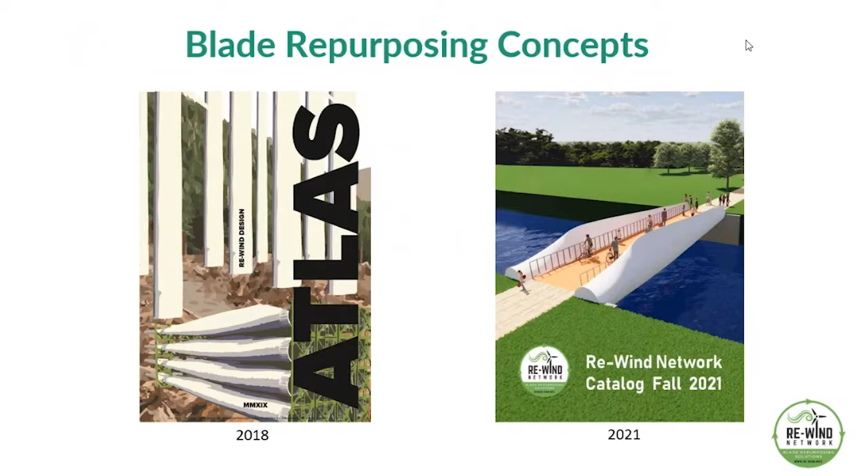As part of our activity, we've done a number of ideation workshops to develop blade repurposing concepts, and then to bring those concepts into engineering reality through extensive virtual analysis, not just renderings. The first one was in 2018. We produced a design atlas, which can be downloaded from our website, and we've just recently completed our 2021 catalog. These are some of the concepts you would see in our catalog - renderings, generally, but using real geometries of actual blades rendered into various situations: housing, bridges, poles, barriers, for example. Many other concepts that many around the world have thought of as well.

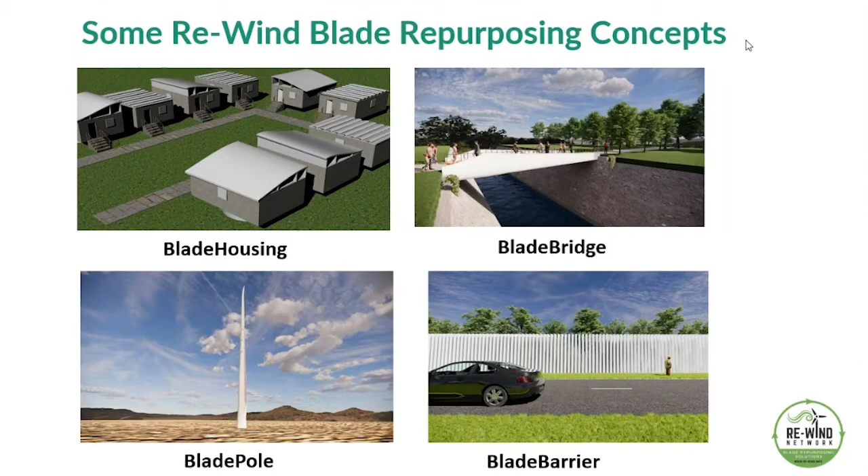Just to give those of you who are not familiar with wind blade technology - the wind blade, of course, is the wing of the propeller, those 3-bladed turbines which are the common ones these days. Those are the energy capturing devices that turn the generator and the turbine. So this, for example, is the first wind farm that I visited maybe 6-7 years ago.

This is in upstate New York. This is a Vestas V82 blade, which is about 40 meters long - a very, very small blade at the moment. You might have heard in the news that now turbines up to 15 megawatts are being built, mostly for offshore, and these are going to be over 100 meters long - 2.5 times the length of this blade. That's me standing at the tip. This blade perhaps has a chord - the maximum chord is at that center where you see the power transmission pole in the middle, the widest part of the blade when sitting upright, edgewise we call this.

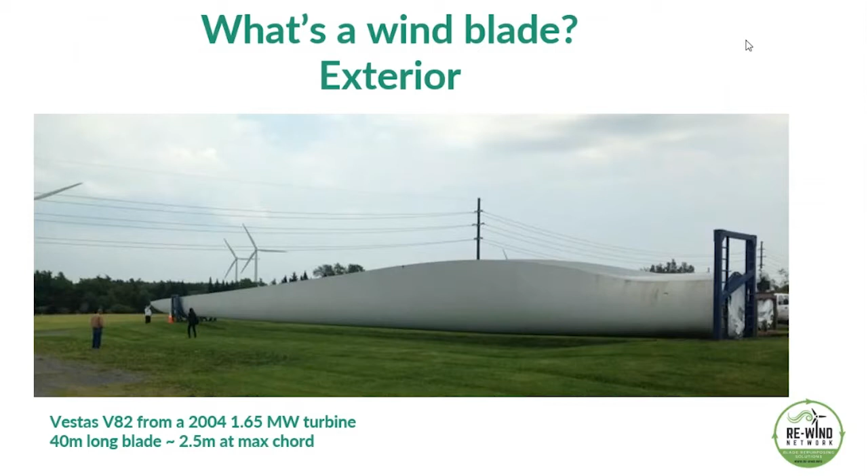What's inside a blade? The inside of a blade is quite interesting. A blade is hollow - it's a hollow tube, not unlike an aircraft wing. All of these blades are made of fiber reinforced composites.

99% are glass fiber reinforced composites. The early blades were glass fiber reinforced polyesters, and nowadays they're mostly glass fiber reinforced epoxy systems. Some carbon fiber is used in some parts of the blade, but very little at the moment.

We have two basic designs that are used. There's what is called the spar box, which is the box shown with the two webs and the thicker region above. This thicker region is what we call the spar cap, and that is primarily unidirectional glass fiber reinforced composite material, maybe upwards of 50 millimeters thick.

The other common design is a single I-beam design, which has a similarly very thick spar cap, and a web which is foam reinforced. Here you can also see the foam reinforced in the box spar, a slightly different design.

Both of these have leading and trailing edge. This is called the leading edge shells, and these shells are sandwich composites. In this case, balsa wood, but also foam may be used. You can see the differences in design - this is a larger blade, and this is a smaller blade.

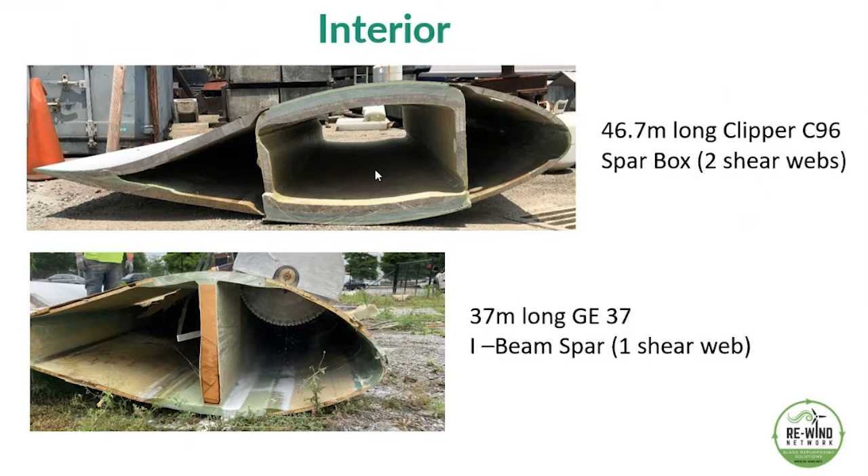From inside, it doesn't look very pretty. From outside, it looks very pretty, and the outside surface is finished to an extreme, to maybe a 5 millimeter geometric accuracy with various sanding and painting operations. Just to give you an idea of what this looks like along the length - sorry if some of the images on the right look a bit light.

The blade tapers and twists. It tapers lengthwise along the length and widthwise, as you can see in the upper left and the lower left. This is along the length, and this is looking down the width.

The profile changes from a circle at the root, where the blade is attached to the hub, through a transition region where the blade changes from the circular cross-section into an airfoil cross-section, and from probably maybe a fifth of the distance down, it then becomes an airfoil blade cross-section.

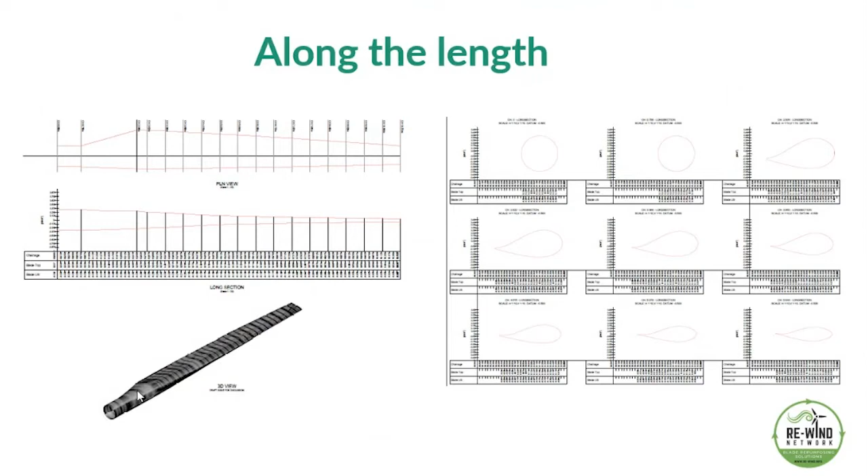This is an image taken from a 14.3 meter blade that Kieran will talk about in great detail later in the presentation. Codes and standards.

Essentially fiber composite materials started becoming of interest to the civil engineering community in the late 70s, early 80s. By the mid 90s, there were a number of activities, mostly starting out in Japan. This work was as a response to the Kobe earthquake, and much of the retrofitting that was undertaken with respect to their bridge and highway infrastructure.

The first document of note to describe structural design with polymer composites was produced in the UK by a consortium called Eurocomp. It was a compilation of documents related to how one would design with fiber composites in a civil engineering, structural engineering environment, as opposed to in what was typically an aerospace or mechanical engineering environment.

I wrote a book in 2006, which is probably the first textbook related to structural design with FRP materials, and it covers reinforcing bars, strengthening materials, and also standalone FRP, fiber reinforced polymer parts.

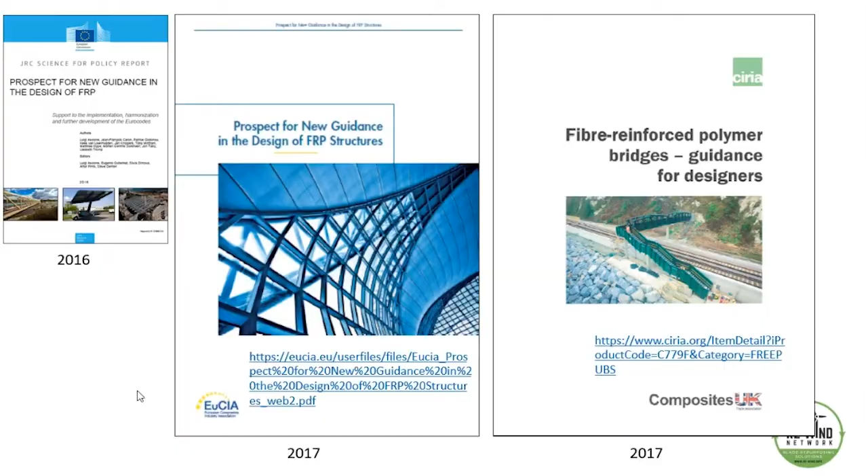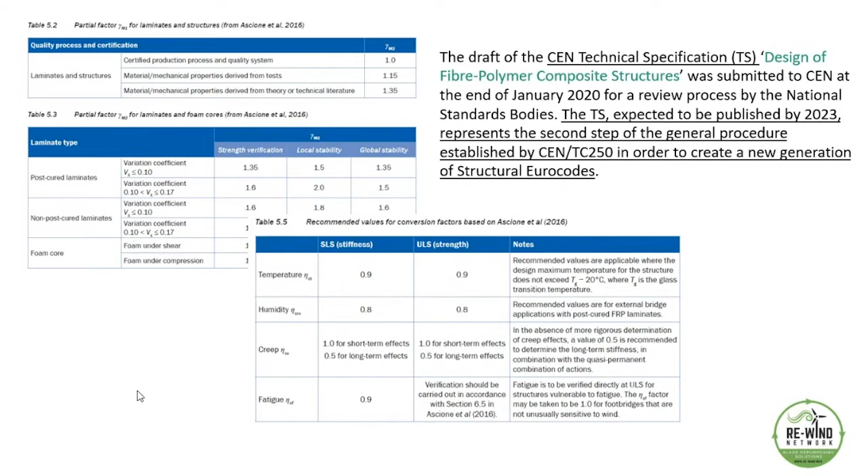Both of these documents include the appropriate partial safety factors, or material partial factors, that would be used in a typical load and resistance factor design procedure according to the Eurocodes.

The future of this draft specification is as follows. The technical specification has been written by a committee, including, from the UK, Professor Toby Mottram from Warwick University. This is to be called Design of Fiber Polymer Composite Structures - not fiber reinforced, but fiber polymer - recognizing that both the fiber and the polymer system, in fact, reinforce each other.

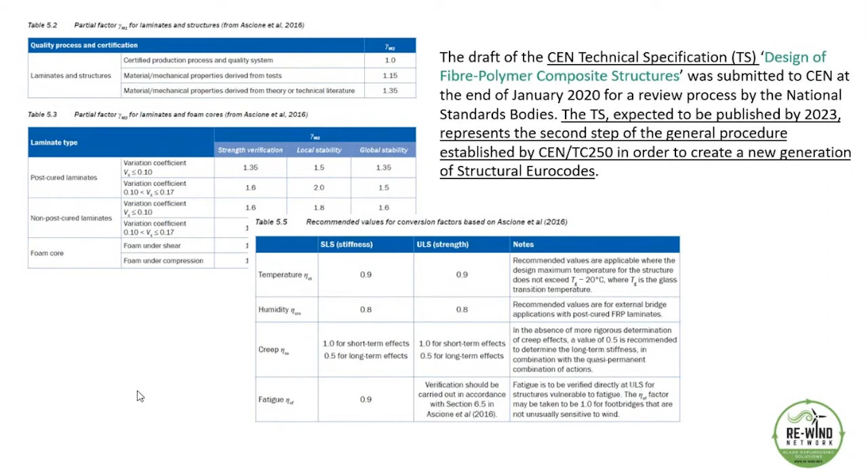This was submitted in 2020. This technical spec is expected to be published in 2023. Then it will go for the second step of production into a Eurocode, which we think should be published somewhere in 2024 or 2025.

So we're well on the way, and there are clear procedures to follow. Just to give you an idea of the partial safety factors: the material partial factors relate to two things. Number one is the uncertainty in the material properties, which can range from 1 to 1.15 to 1.35, depending on how the material properties are obtained, either from testing or theoretical predictions. The second part of the partial factor is the uncertainty related to the production method of the composite, which can go from 1.35 all the way out to 2.0.

These characteristic values used together with the material partial factors are defined as the 5% fractile of the material property value, following a standard Eurocode characteristic value determination. To give you a sense of applying those factors: the worst case would be a factor of 2.7. Inverting that gives you 0.37 - in other words, you're utilizing about 37% of the capacity of the material. A best case scenario, you would utilize 74% of the material capacity in your material partial factor. But that is not all the reduction that takes place.

There are what are called conversion factors. That material factor and characteristic value is again knocked down or reduced for temperature effects, humidity effects, creep effects, and fatigue effects. This gets fairly complicated and depends on the actual application you're interested in. So that factor can get knocked down another perhaps 40 to 50%. So your worst case would be operating at about 15 to 20% of the ultimate capacity of the material. In your best case, you might be operating at 30 to 40% of the material capacity. So there are, in the existing code, significant factors to enhance the safety of design with fiber composite materials at this time. One expects that as time goes on, these factors will be reduced.

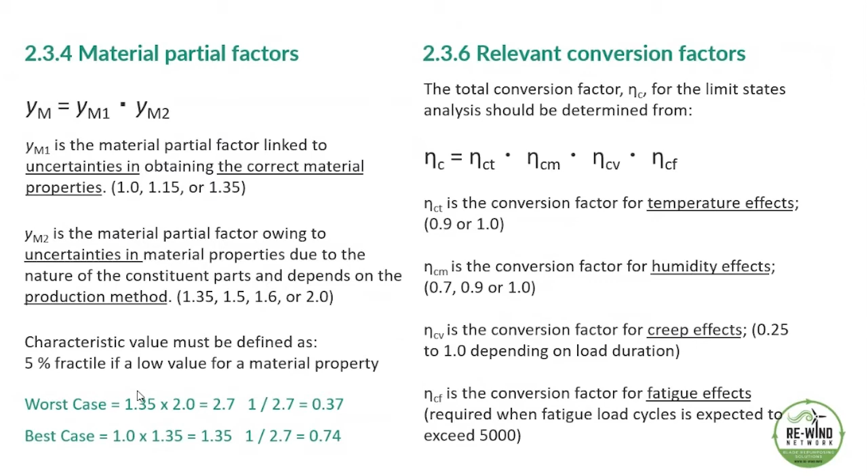And this is not considering the load factors, of course, that are applied to the other side of the load and resistance equation. So what's the problem? What is the wind blade material quantity in the UK?

Looking at installed capacity up to 2021, this is the current information as of the second quarter of 2021. These are the statistics - currently the UK, up to 2021, has a cumulative capacity of somewhere around 20 gigawatts.

This translates into blade material. Here we've got the cumulative capacity in thousands of tons of material from 2020 to 2041 installed, and this would be the material coming out of service, offshore and onshore. We have material coming out of service, but not much now.

Because we're assuming, and this is a common assumption, that the turbine is designed for a 20-year life, and we can use a conversion of 10 tons per megawatt. This is also subject to some debate because many turbines have lifetime extension now, and many are coming out of service before their 20-year life due to repowering activity. But assuming 20-year life and 10 tons per megawatt...

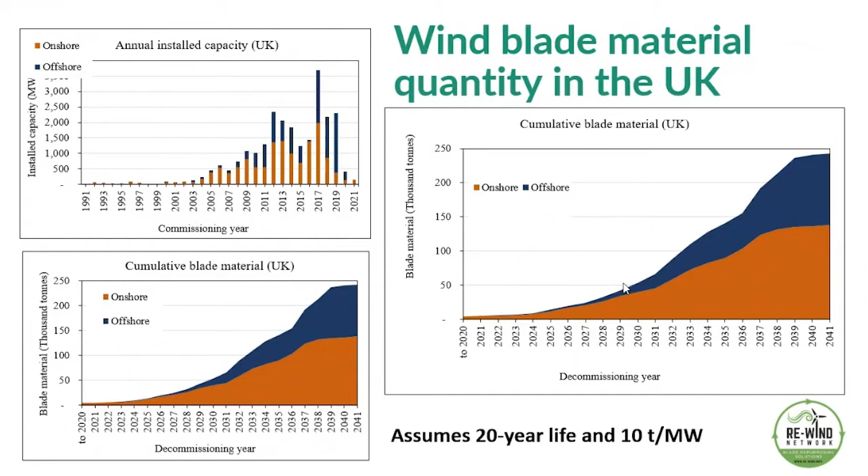If you cannot send these to a landfill and you cannot incinerate them, you have to recycle or repurpose them in some way. There have been a number of recycling ideas proposed over the years. Most of them include downsizing the product, either grinding it down and using it as a filler, or going even further to chemical decomposition called pyrolysis, a heat treatment to burn away the resin and recover the fiber for secondary use. Those are mostly still in either the non-commercial or experimental area.

So what we are talking about is repurposing the blade - taking the blade and using it for some other purpose in civil engineering applications.

Having shown you the pictures of the blade, both from the inside and the outside, as a structural engineer—I'm a structural engineer, Kieran is a structural engineer—you recognize immediately what you need for engineering analysis. And it's non-trivial. You need the external geometry, so you need the airfoil shapes along the length. The blades bend and twist along the length.

You need an internal geometry. You need to know the location and the thickness of the caps, the webs, the shell sandwich panel along the length. You need to know the material types, typically glass, polyester, and epoxy. And you also need to know the laminates which make up this material.

You need a mass and volume fraction, so you need to know the material and where it is. Then you need to know the strength and stiffness of that material.

And then for structural engineering analysis—which is typically how structural engineers work—you need to know global blade structural properties: the flexural stiffness in both directions, the principal axes, and the shear rigidity or stiffness, including the shear stiffness with respect to transverse loadings, because in these fiber reinforced composite materials, shear deformation can be significant.

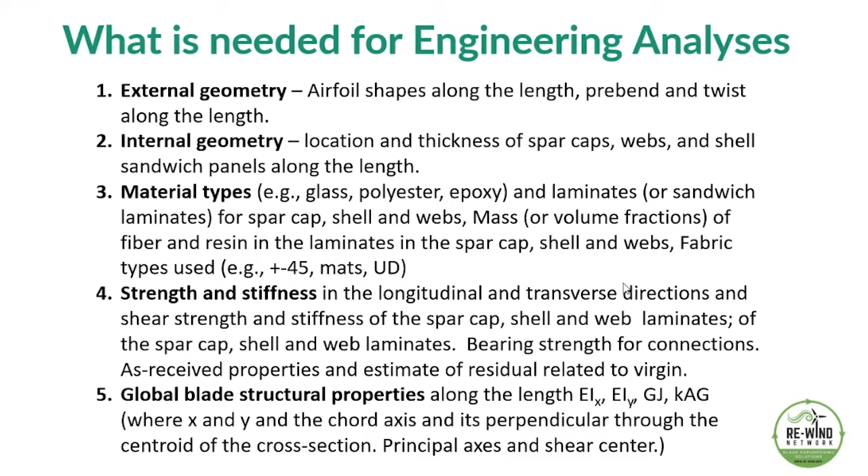However, when we do what we call one-dimensional structural engineering analysis, we need these one-dimensional properties for civil engineering, and that, once again, is not trivial to obtain. We have worked for the last four years in our Rewind group because we recognized very early on, after lots of brainstorming sessions, that until you know the actual geometry and actual properties, you cannot really design anything from an engineering perspective.

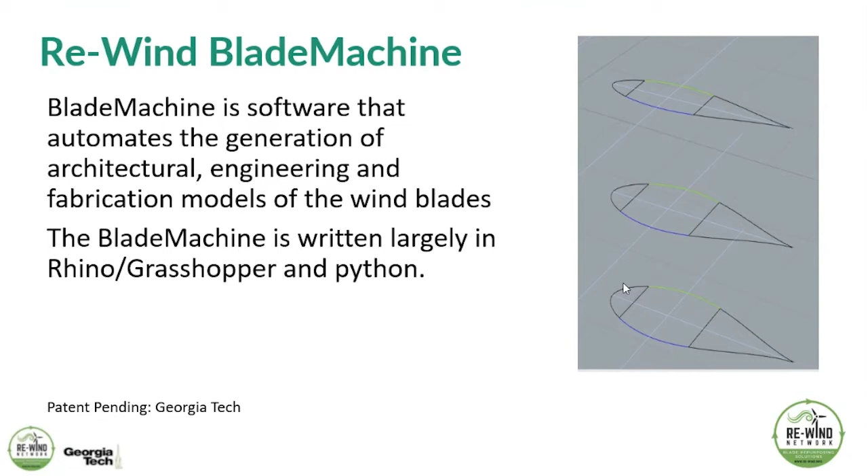So drawing a sketch of a repurposing project is nice, but it doesn't get you any further than a rendering or sketch. So we've developed a procedure to extract all of this information, going from LiDAR scanning of the blade, both inside and outside, some minor destructive coring of parts of the blade to determine thicknesses and materials, and then a code to develop the structural properties that can be used in any conventional structural engineering analysis program, such as SAP, RISA, any of the frame programs you might want to use.

So now we come on to examples of engineering analysis. I will very briefly describe first the work we did, using a blade section for a roof of a 40-meter-squared affordable house. That was a finite element analysis done at that time, because this roof is a shell type structure.

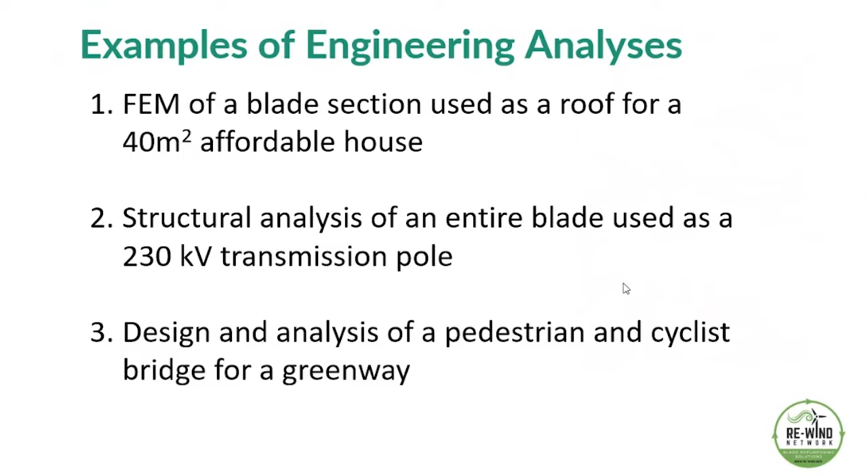We will then look at a structural analysis of an entire blade used as a 230 kilovolt transmission pole, which is actually a project we're working on currently in the United States, to be installed sometime in the next year. And then the design and analysis of a pedestrian and cyclist bridge for a greenway, the bridge being built in Cork, which Kieran will take over and describe.

But there were models of 100-meter blades that had been produced by Sandia National Labs in the United States, and also a very effective code to produce geometries and layups called NUMAD. This is downloadable from the National Renewable Energy Lab, NREL, in the United States, very easy to find. And from that, we extracted real geometries of the actual blade.

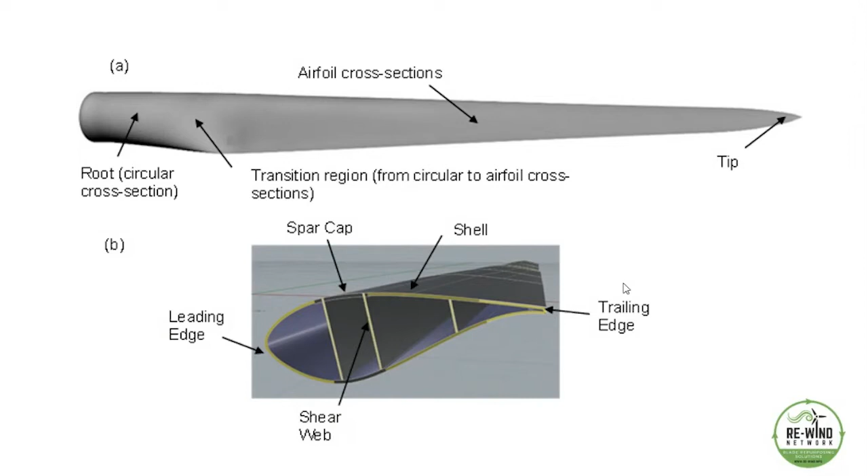This blade was designed to have a carbon fiber spar cap, which was needed for the stiffness of this particular structure. Some of the new carbon fiber 100-meter blades are also using carbon fiber in parts of the spar cap and other parts, and a foam trailing edge.

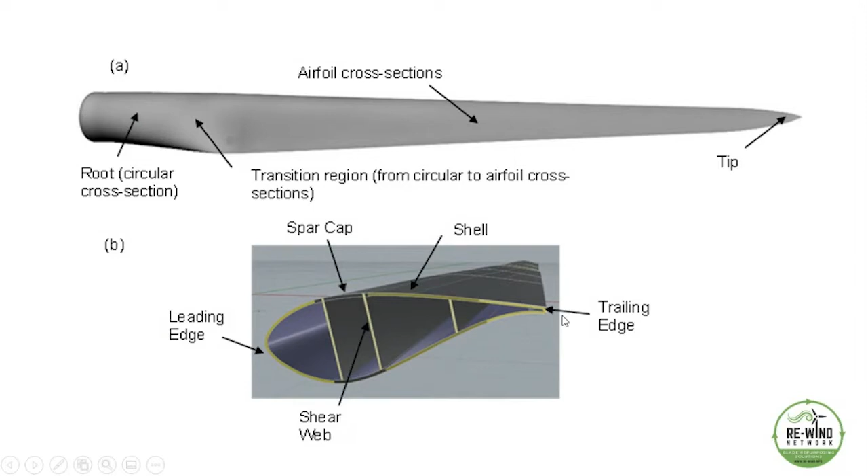This had 3 webs as opposed to 2 webs. This third web is quite common to see to support this large trailing edge panel, and typically only extends about a third of the way down the length of the blade.

Just to give you an idea of the analysis we did, this is the roof part. This blade is so big that if you cut it in the transition region, that transition region is about 7 meters wide. These are enormous, these blades. They really are enormous. This is 7 meters wide.

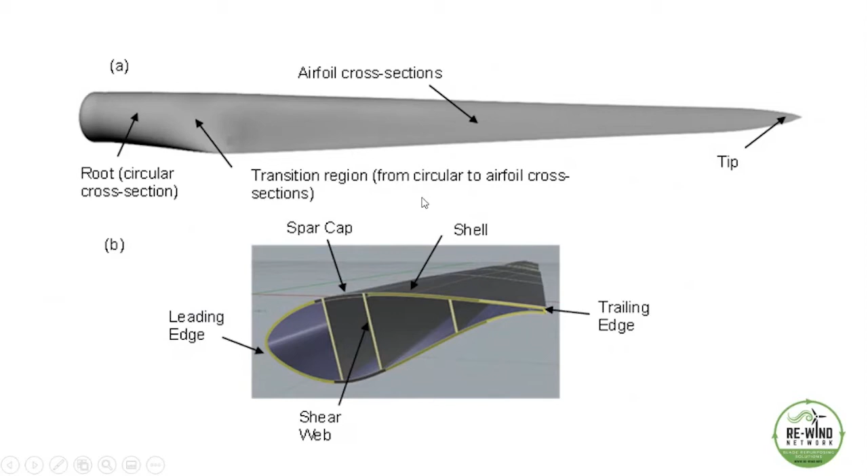You can make a house out of it, as you've seen. But here we just use half of that transition region to build a roofing system, which is about 4.5 meters wide and 8 meters long.

We used the LS Dyna finite element code to look at basically stresses and displacements and behavior in the different panels and in the different layers of the fiber composite material.

So, of course, with the finite element code, one can dive down into all of those details. As one knows, with the finite element code, you've got to know what you're looking for and know where to look for it many times to find the appropriate and relevant information that can be used for structural engineering.

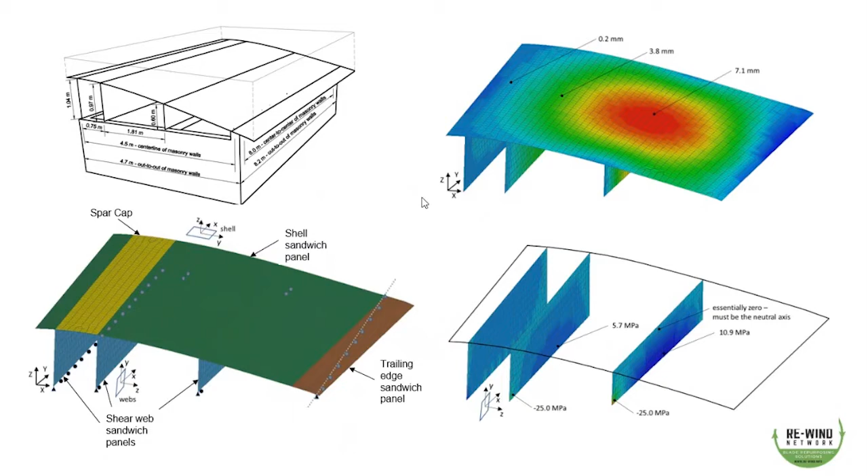A paper that is listed in the references that follows describes how the hand calculation of the same parts of this roof section was done and compares it to the results of the finite element analysis, the hand calculation being one-dimensional structural analysis, as structural engineers often do.

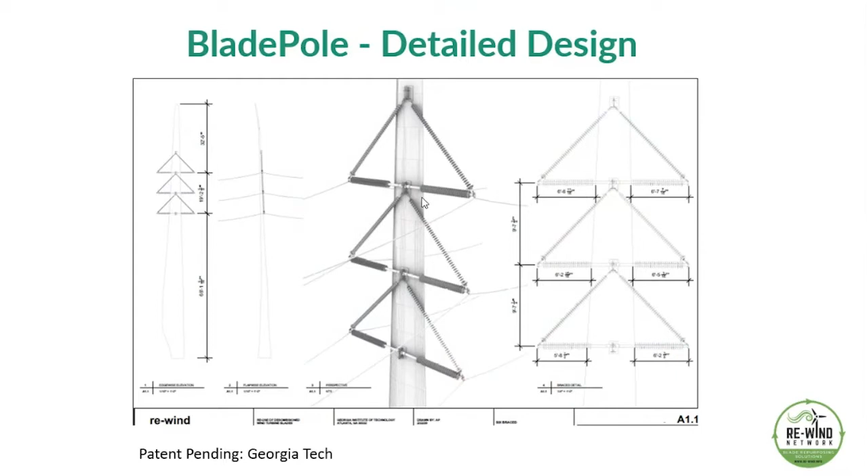The second example, quickly, is what we're building in Kansas in the United States. This is a blade pole, used as an electricity transmission pole, not distribution. This transmission pole is going to be about 120 feet high. The blade is a GE 37-meter blade, and we are at the point now of actual detailing and construction of this blade using full-size parts from transmission hardware.

We've done various cases of these, and these papers are also in the references listed, using our blade machine, extracted the section properties, and done conventional structural engineering analysis for the appropriate load cases for electricity transmission lines.

These are not the standard load cases that are used for buildings, and there is a code both in the US and in Europe for designing transmission structures. That gives the load cases and the factors required for those loads.

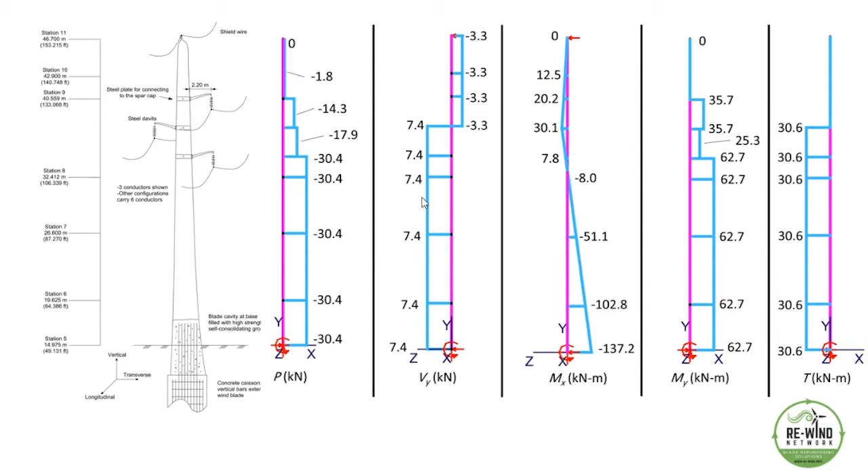So in fact, the most critical parts of this are up near the top of the blade where the fixtures are attached, because the section is thinner there and the material is thinner there. This is obvious if you think about it as a structural engineer, but needs to be kept in mind that any stress analysis of a non-uniform section has to take account of the structural properties as they vary along the length.

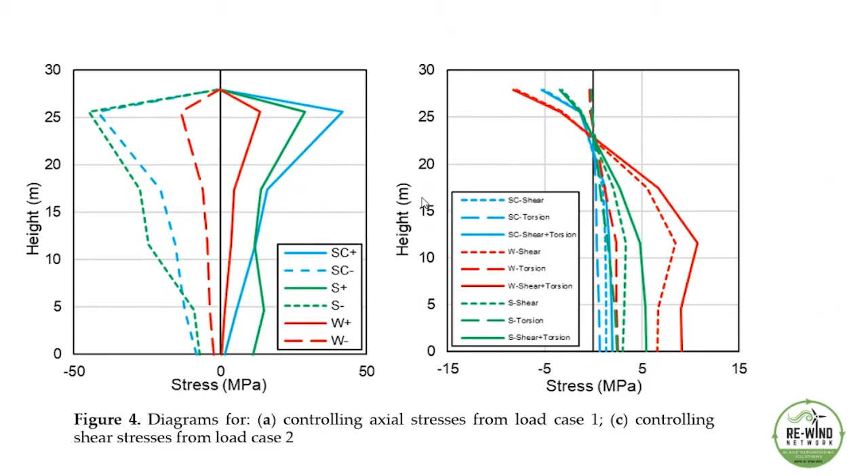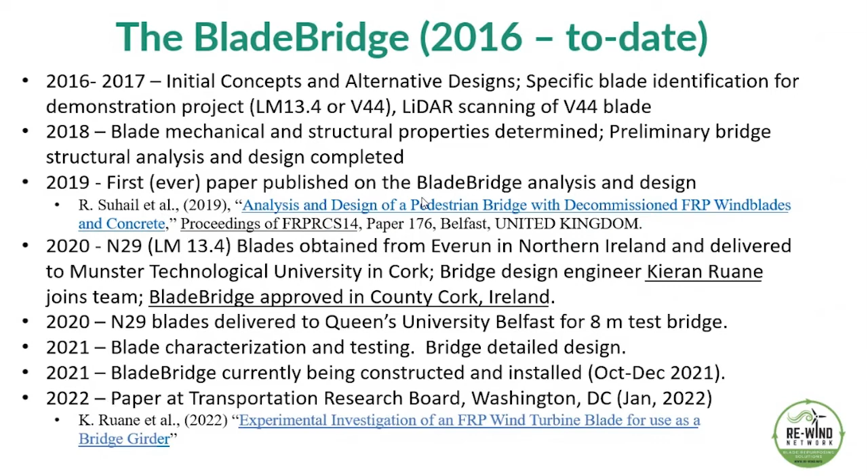The blade bridge, very quickly, is something we started about in 2016, 2017. We published a paper in 2019. We will be publishing and presenting a paper at the Transportation Research Board in Washington, D.C. in January '22 related to the work that Kieran is about to describe very shortly.

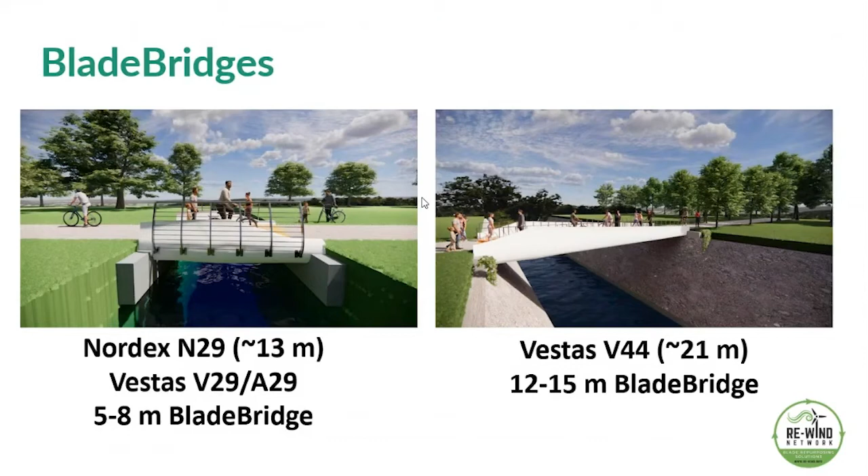Blade bridges can be of different sizes and spans depending on the blade you use, and they can have various different geometries. We decided initially to start with very simple, mass market bridges. One can envision all sorts of fancy suspension bridges, arch bridges, all sorts of funny or interesting systems.

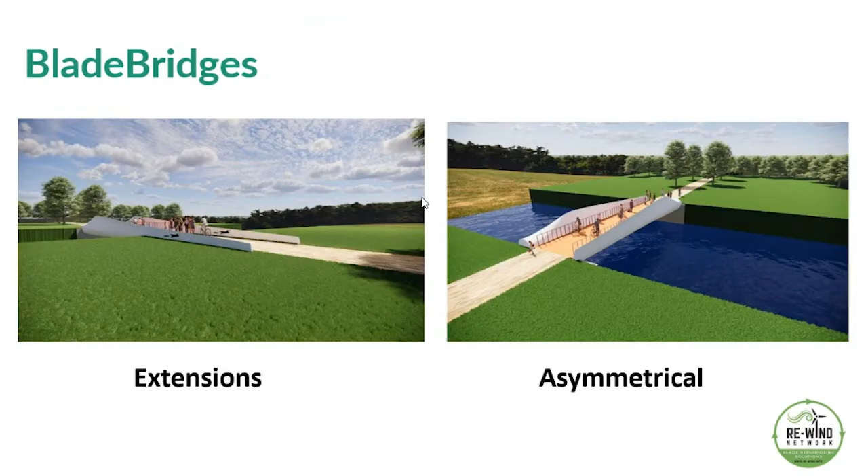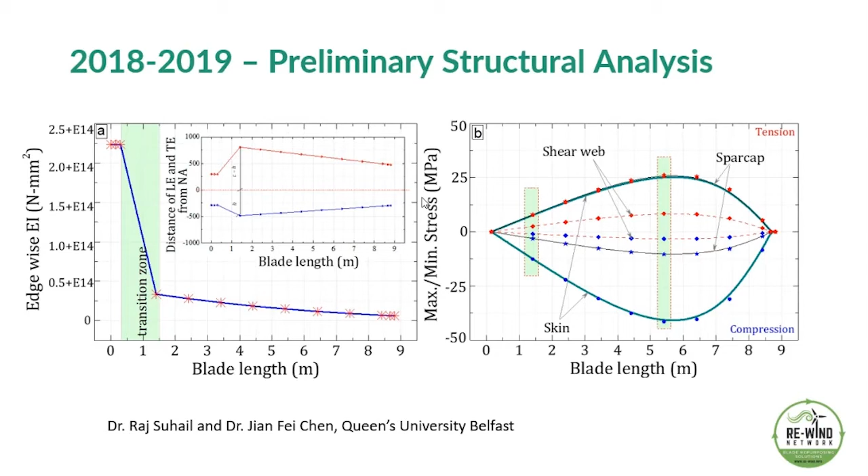But if these are going to use up a large quantity of blades of any type, there will have to be a relatively simple mass market application of these. This was the preliminary concept we started with, and this is some of the preliminary analysis done for the stresses and displacements along the length of the blade. This was done for a moving load, so you also have to take into account a moving load on a variable cross-section. This is an example of a cross-section with a deck system.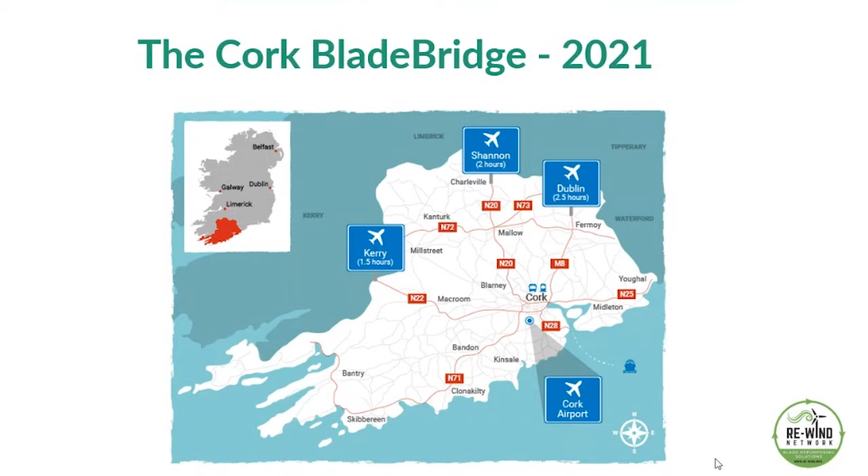The project I'm going to talk about more specifically is the conversion of an old railway line between the village of Midleton and the coastal town of Youghal, in the east of Cork City.

In Ireland at the moment, there's a big rollout of what we call greenways, dedicated pedestrian cycleways, with hundreds of kilometres planned in the coming years. It's a very active part of our infrastructure rollout, so much so that the government is granting significant money towards greenways, and has taken a policy decision that infrastructure spending will be 2-to-1 in favour of public transport, greenways and railways versus roads. So road funding is being deprioritised - two wheels good, four wheels bad, you might say. The car is being less prioritised than it used to be.

The distance from Midleton to Youghal is about 25 kilometres. It was a railway line constructed around the 1870s onwards, and in its heyday would have been very popular, part of the overall Cork to Youghal and onwards rail connection. A lot of people would have gone on their holidays to Youghal by train. In subsequent years it became very much a freight service for a few industries located in Youghal, and it fell out of use in the 1980s.

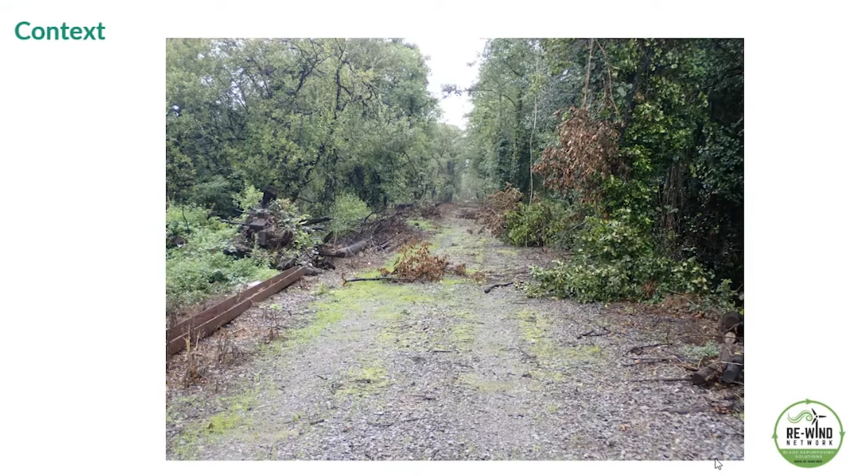This is the state of the railway line at the moment, following some site clearance works. As you can see, the rail line has been lifted up, leaving the railway corridor in place. The Greenway, when finished, will have a cross section of about 4 metres - a combined cycleway and pedestrian way. These have proven very popular in Ireland, with a few significant ones built in recent years.

Cork County Council are the client on this job, and they've been very helpful and accommodating to us - we're very grateful to them. They're facing the enduring challenges of restoring an old infrastructure line, so there's plenty of tired and disrepaired bridges, new bridges to be built, bridges to be redecked, and all that type of thing.

We first approached Cork County Council a few years ago about the possibility of building a blade bridge on the Midleton Youghal Greenway, and they engaged and were very happy with the idea. Through a number of studies, we identified this particular structure as a candidate. It's located about 2 or 3 kilometres east of Midleton, in a townland called Roxborough, and it's an old railway bridge comprising 2 wrought iron beams. It had timber decking in the past, built on cut stone masonry abutments, and it seemed like a good candidate.

The structure itself spans over an overflow or flood channel from the Dungorney River. This whole area is local to Jameson distillery - you might be familiar with Jameson's, our national whiskey. A lot of the ground here grows barley used in the whiskey industry, just an aside.

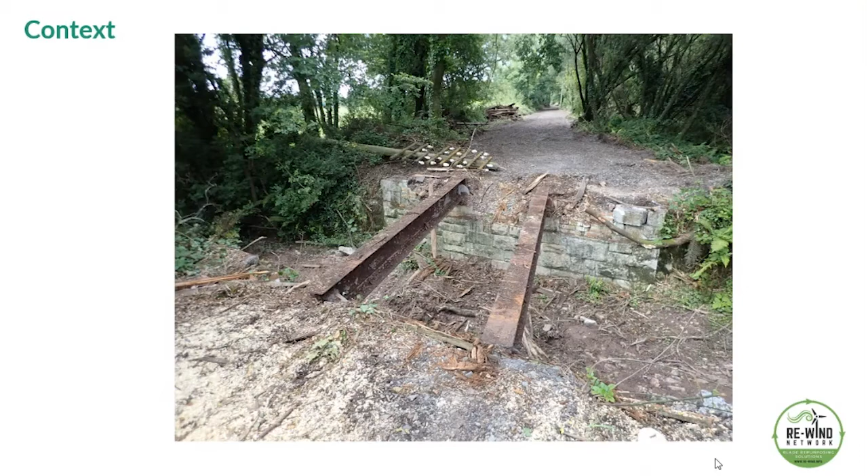The next slide will show a video. This shows the condition of the existing abutments as they stand. You can see in the background there's a temporary haul track for the construction of the Greenway.

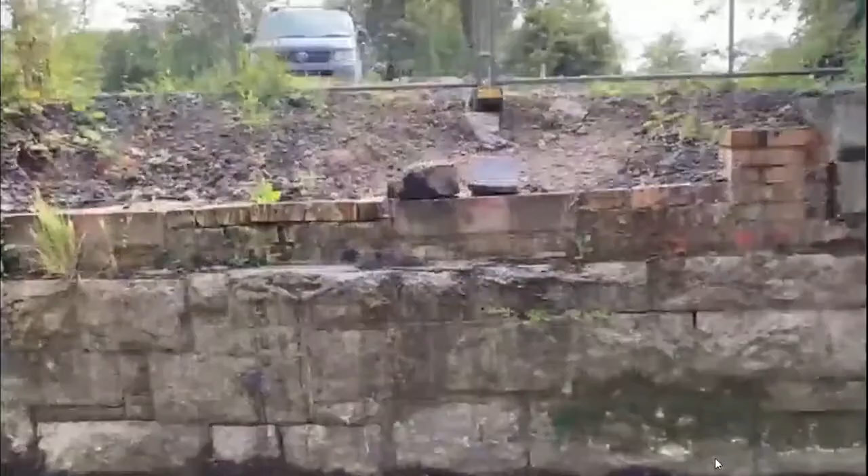The abutments themselves are generally limestone, cut stone, about 750 wide, with engineering brick on top. Below engineering brick level, the abutments are in solid condition. You can see an old paved riverbed there as well for the overflow channel.

In general context, if we were to use these abutments, the span is about 5 meters, give or take. The width of the Greenway structure is 4 meters, but there are narrower structures on the line, so it would be possible to locally provide a lower width than 4 meters. The idea is to provide 3 to 4 meter clear width, and the skew of the bridge is generally just shy of 18 degrees.

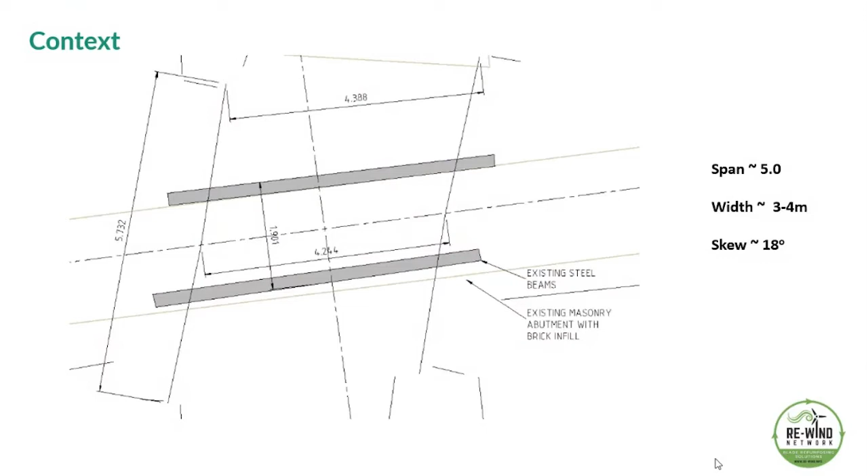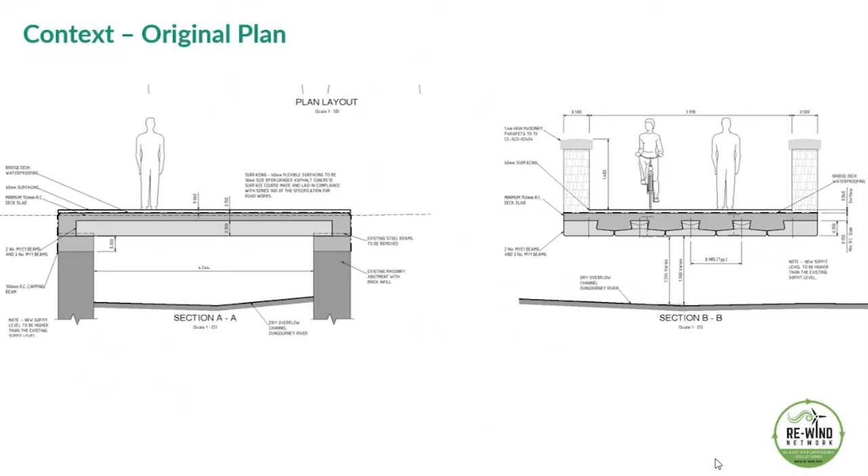More typically, we have a very large and well-established concrete industry in Ireland, so the original plans for this bridge were something along this scale - using pre-stressed beam, concrete infill slab construction, maybe with masonry parapets.

We presented various ideas to Cork County Council for the blade bridge. A lot of the images here were prepared by Zoe Zhang, a student at Georgia Tech who spent 6 months with us in Cork on the project earlier this year. You can see the basic concept there.

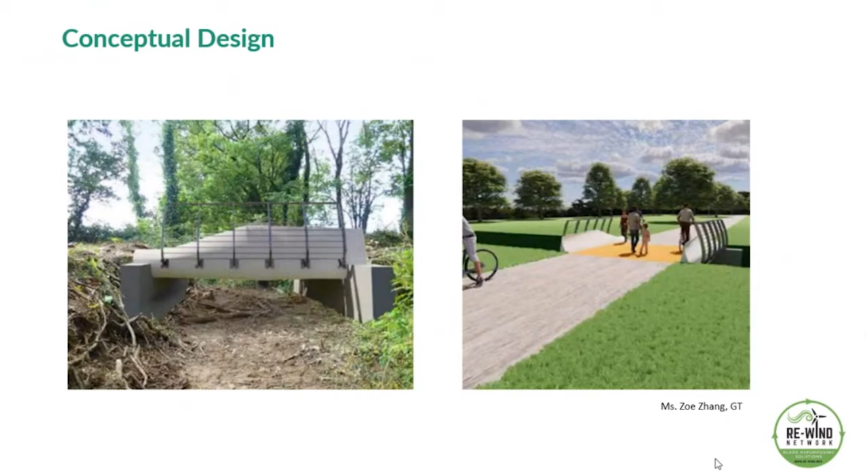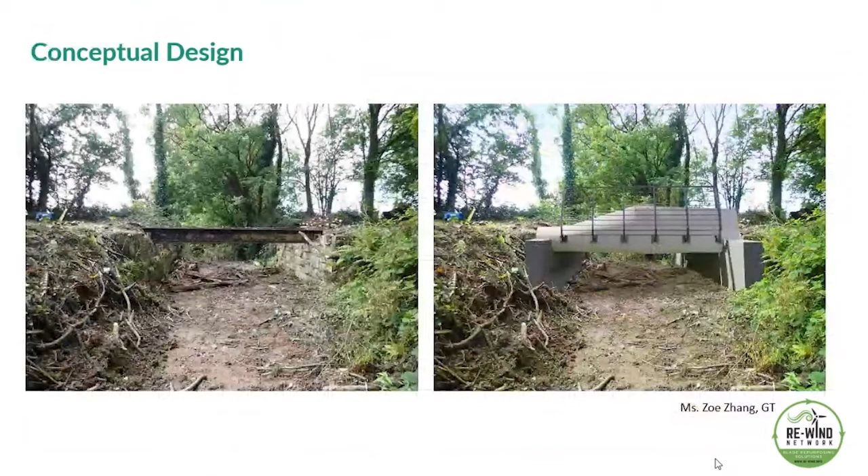It's a short bridge, only 4 to 5 meters, using the root end of the cantilever and playing around with parapet ideas. There are various other images there just to get a feel for the structure, including an image of the blade in situ.

As alluded to earlier, working with wind blades is complicated by virtue of many things, but also primarily by geometry. The geometry of the blade changes in various different directions. We're used to working with rectilinear elements as steel and concrete engineers, so dealing with the blade itself provides its own challenges, not only to do with shear centers and structural aspects, but also geometry.

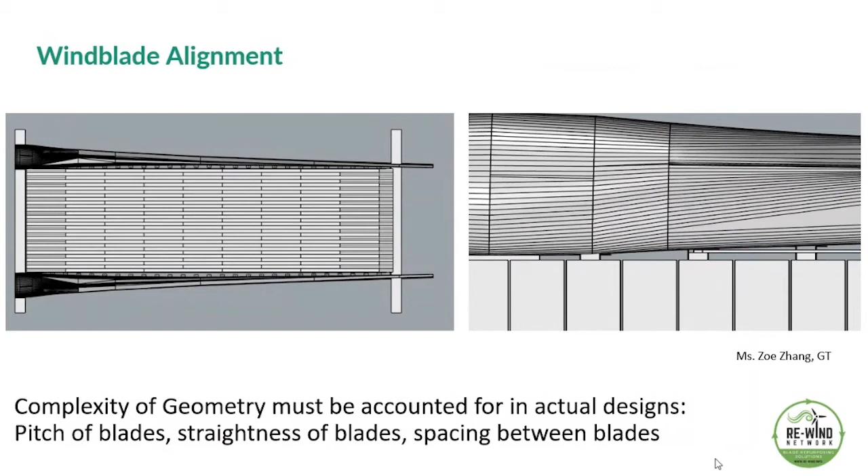As part of the project, the search was on to locate blades which could be repurposed, and the Rewind team sourced blades sitting in a yard in Belfast - Nordex N29 blades, getting ready for relocating from Belfast to Cork. One important thing in reusing blades for construction projects is to get a good laser scan of the elements, so here, just before loading onto the lorry, a laser scan of the external surface is being undertaken.

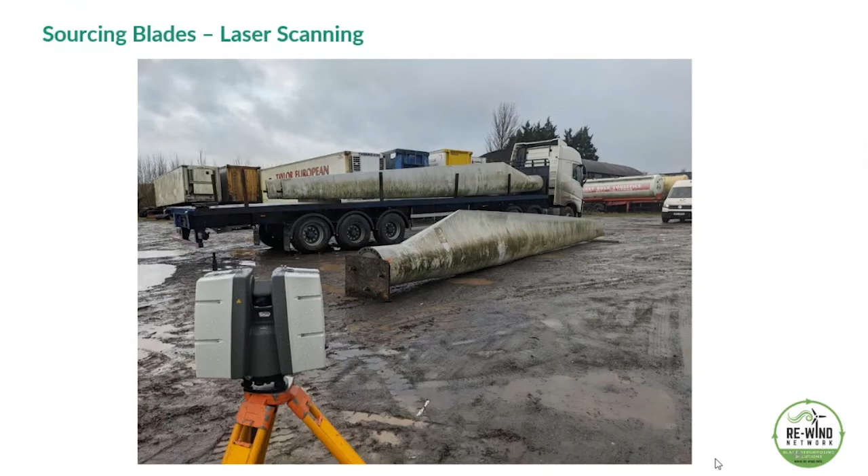We took a number of these blades down to Cork - 3 of them came into the structures laboratory yard at Munster Technological University. 2 are primarily to be used, ideally, in the construction of the bridge, and 1 for various tests to help us understand the strength of these beams, their deflection and vibration characteristics, and to what extent we can reuse them. This shows the blades arriving in the yard in Cork just before last Christmas.

So we were just digesting what we have in our yard at this stage. And Maggie, there's our senior technician.

We weren't that familiar with FRP as a material in the laboratory, so we did a number of training sessions with the technicians in Georgia Tech, in terms of how to handle the material, how to cut it, prepare it, and so on.

This was our first attempt at cutting the blade. As an aside, you can see the blades had been sitting in the yard in Belfast for some period of time and had taken on a coating of algae, but it didn't take much effort to clean the blades down.

As Larry mentioned earlier, on the exterior surface the blades are actually very smooth. They're nice things to touch and feel - there's a high tactile quality to them, and we were keen to incorporate that part of the artifact into the design, so people could touch and feel the blade and see the high quality of its manufacturing.

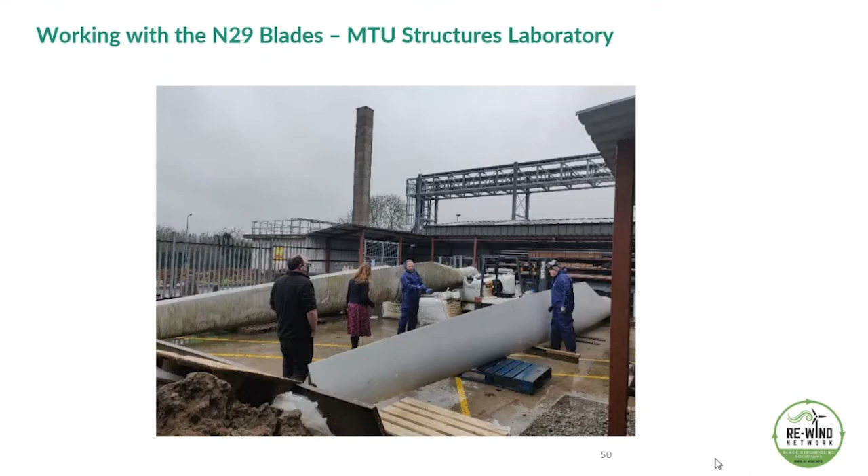This is the first piece of blade we cut - it only took a few seconds. You can generally see the bits and pieces of construction that Larry alluded to earlier: the leading edge on the right hand side, the trailing edge on the left, the webs, your vertical members, and then the spar cap, which is that part of the blade skin between the webs.

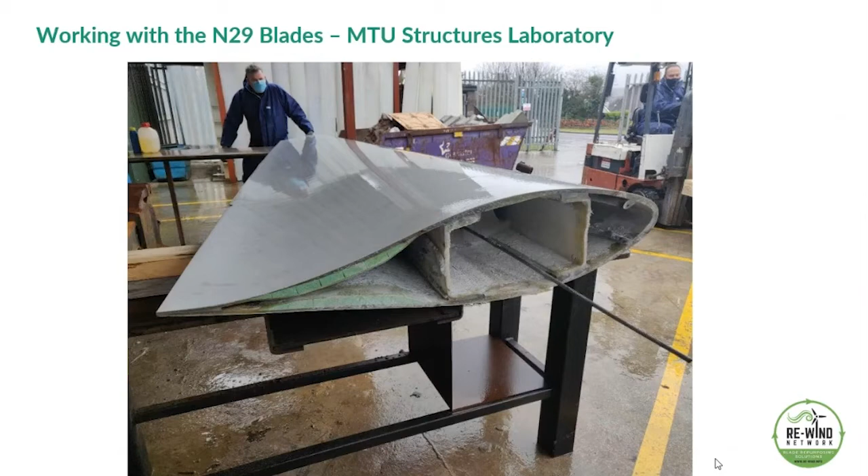The webs here have downstand sections as well, so it's a C section bonded to the overall skin of the blade. That cable or wire going through the blade is just a control system, from where the older blades used to have a movable tip in them to improve efficiency, etc.

We had already undertaken external laser scanning of the turbine blades in Belfast before getting out to Cork. Internal scanning was undertaken again with laser scanning, which allowed us to put a full 3-dimensional model of the blade in place.

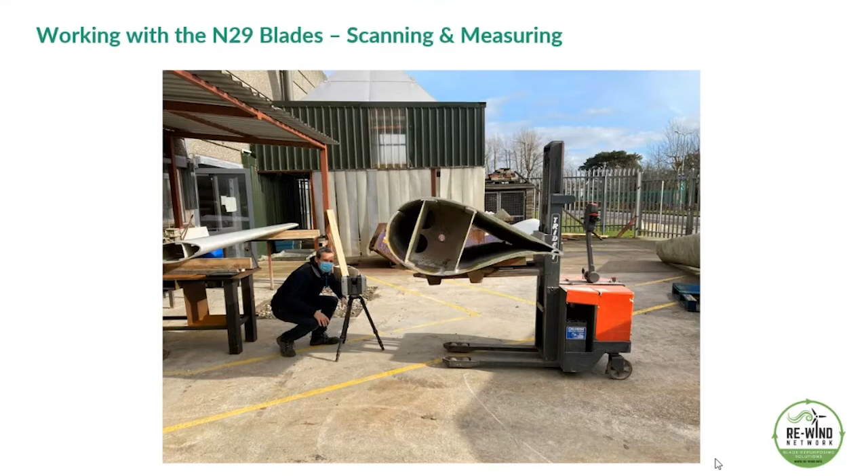Here, literally, the top left-hand section gives a plan view of the blade. The long section is shown below that, and then the various cross sections. So the geometry of the blade is quite complex - it changes as you move along the axis of the blade, and it was very important for us to get a feel for the geometry before we start designing.

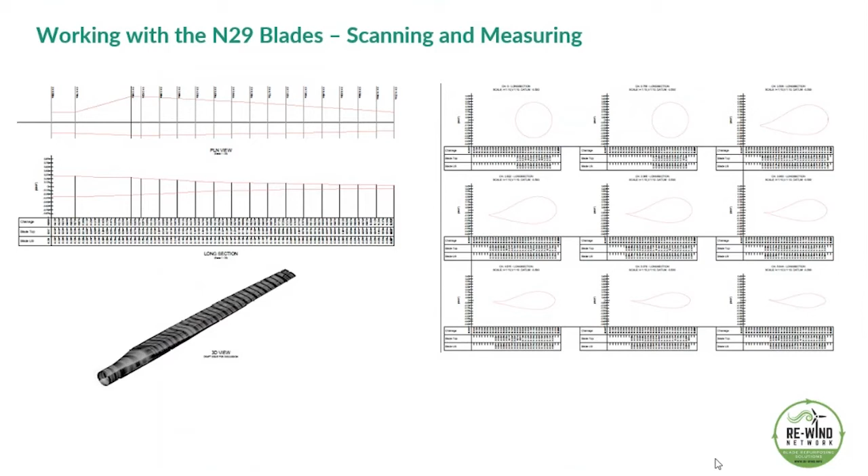From the period of, say, January, February up to maybe July, August, we spent a lot of time investigating the blade, doing various structural load tests, designing and testing connections, and doing GFRP burnout tests to help characterize the material in more detail.

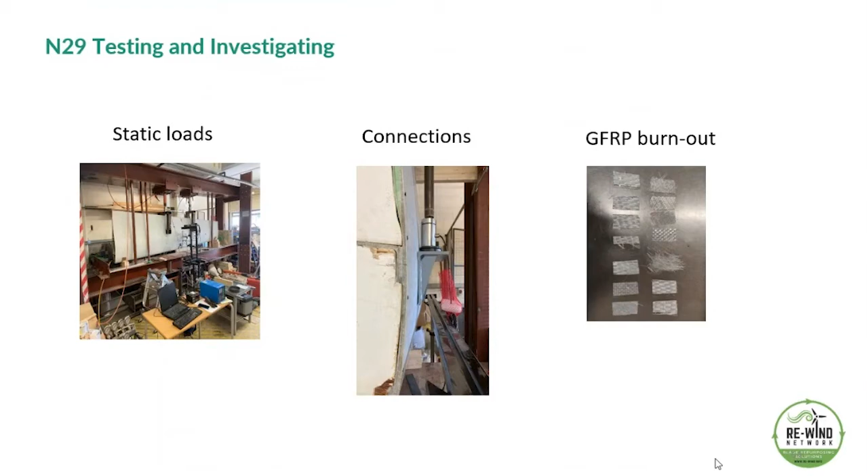We undertook a series of static load tests. We have a test rig in our lab in Cork that can generally apply a total of 1,000 kilonewton vertical load. We took a 4-meter section of the blade, cut to suit the size of our test frame, and cut holes in the skin of the blade, passing through a steel box section so we were applying load directly onto the shear webs. We did essentially a 4-point bending test.

We were monitoring on the right hand side there - you can see a few linear variable differential transducers just to measure deflection horizontally at the top, in case of top edge buckling in the compression edge, and various vertical displacements at lower points.

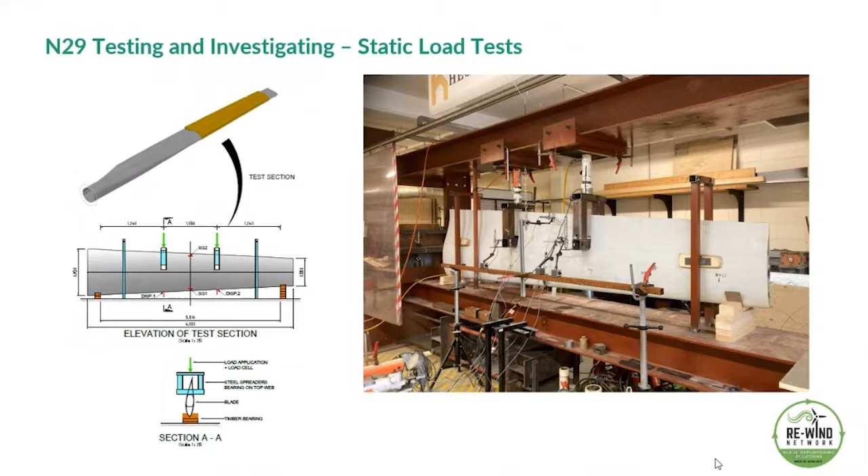The next slide is a video, about 30 or 40 seconds long. If you look at the last 5 seconds, you'll see the far edge on the left hand side, the blade undergo a bit of a drop or a failure - what's happening there is separation of the web. There's about 9 tons on the blade near the end section.

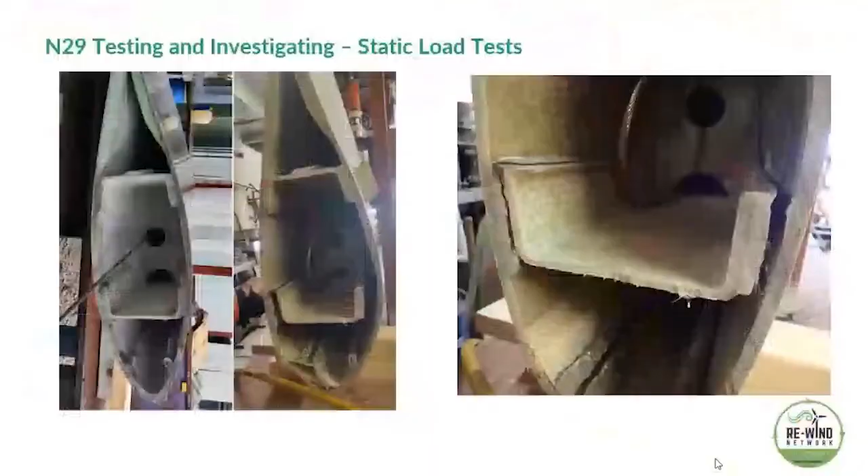On the left hand side there, you can see the before and after shots just at the bearing end of the blade. There was separation of the shear web and the downstands from the side of the blade, with more detail on the right hand side. That's what you saw in the last 3 or 4 seconds of the video, where it sheared and dropped at that point.

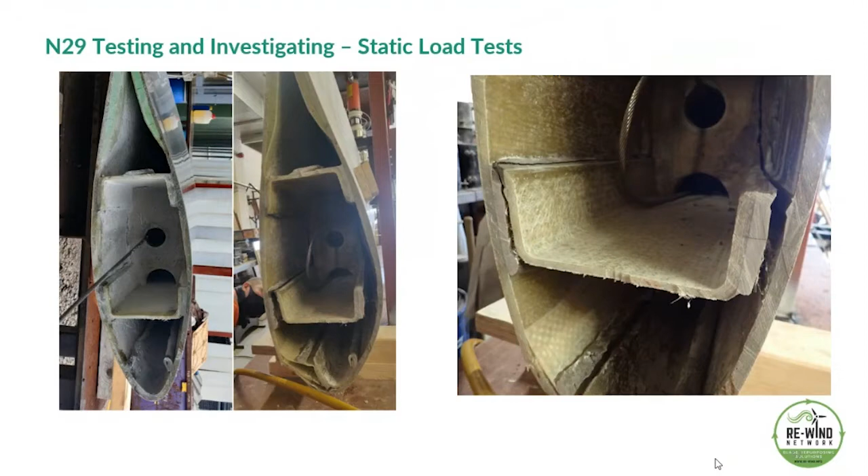Once we had the blade demounted from the test rig, it was a question of taking sections through it and tracking the damage, seeing exactly how the section behaved and to what extent the damage was localized at bearing areas or more generalized. What we found was that the failure was very localized to the bearing areas. On the right hand side, you can see a longitudinal crack running along what might be the leading edge of the blade, extending maybe 300 to 500 millimeters around the bearing area support, and the web had separated from the skin.

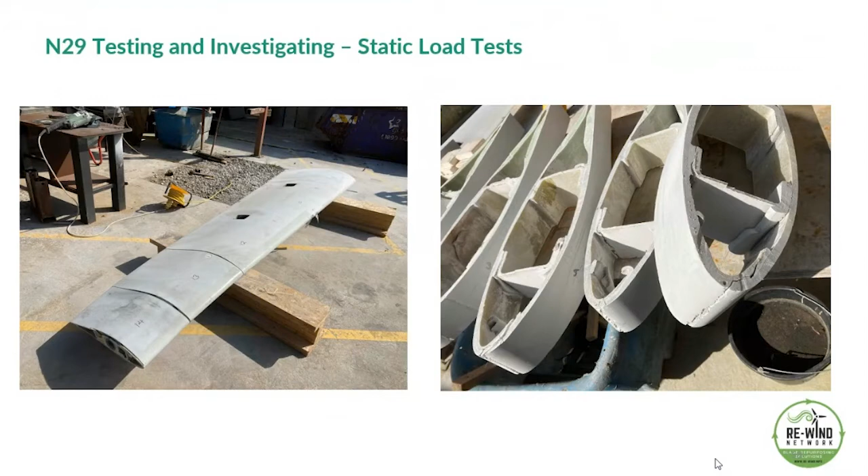The structure at that point had undergone, it took just shy of 90 kilonewtons, or 9 ton, and then damage occurred and it unloaded, with a bit of creep movement. In general, that smaller section of the blade took about 90 kilonewtons total load before it failed.

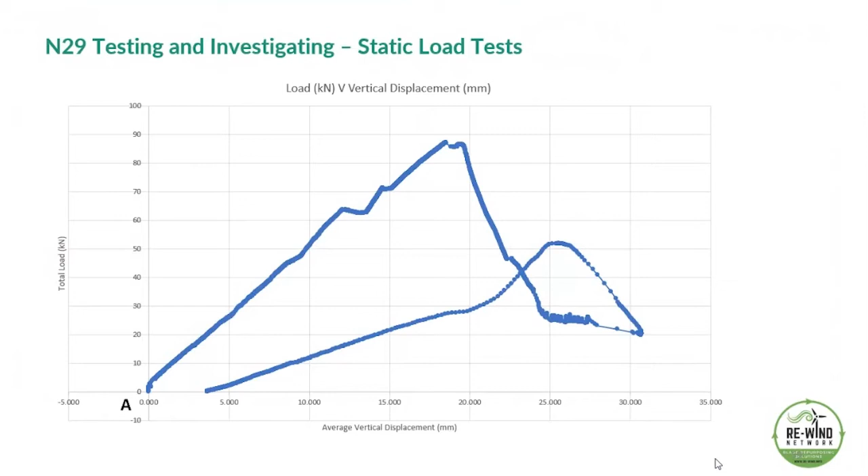We subsequently cut up the blade and did a series of connection tests. With the connection tests, we're mindful that the deck of the bridge is undecided, so we're just playing around with various connection types. We tested 3 connection types in total. The first one was just a M12 grade 8.8 bolt.

The second test was a similar size and grade of bolt, but a blind bolt, which is a proprietary bolt system used for bolting through things like hollow box sections where you can't get access to a nut to tighten the bolt on the other side. We also looked at 12 mil diameter threaded bar passing through the structure of the blade. All these connections were found to be taking typically 5 to 6 ton before failure.

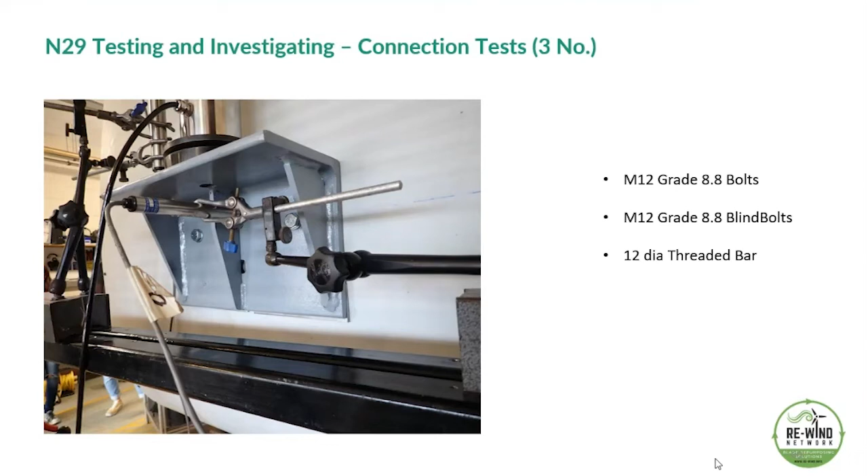Generally, failure was associated with the bolts more so than the material itself, although in the test of the threaded bar there was an element of bearing through the FRP material.

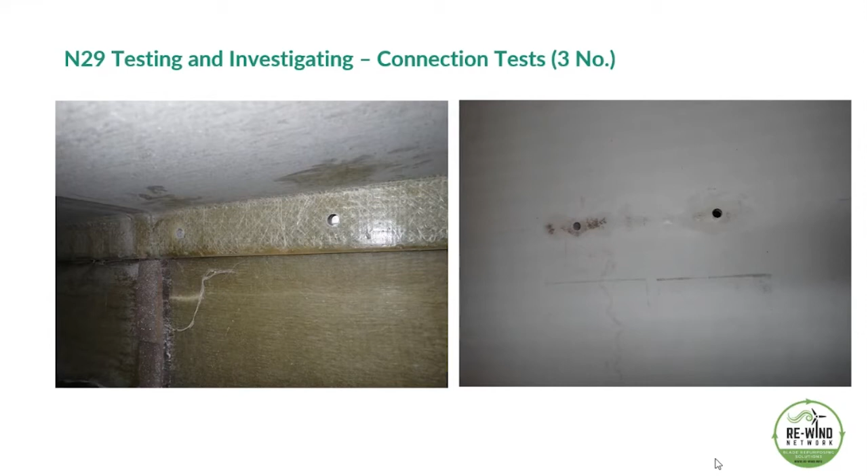This is a view of the blade after the first connection test, inside and outside. You can see there was no apparent surface damage at all around the bolt holes, so we were quite pleased that the material behaved very well in that situation.

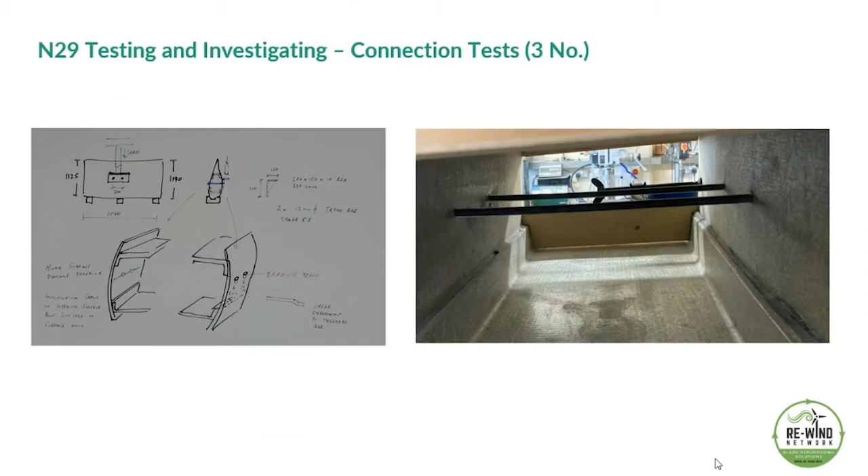This is our threaded bar test. In this location, we decided to pass the threaded bar through the blade itself, and because we don't have the thicker section where the web downstand is, the threaded bar was able to cut through the material a little bit, so we got bearing movement in the holes themselves, and a bit of bending in the thread bar.

You can see that the thread bar, under 5 to 6 ton of loading in total on the connection, has moved down through the material somewhat. And on the right hand side, the thread bar also suffered its own little failure along the shaft.

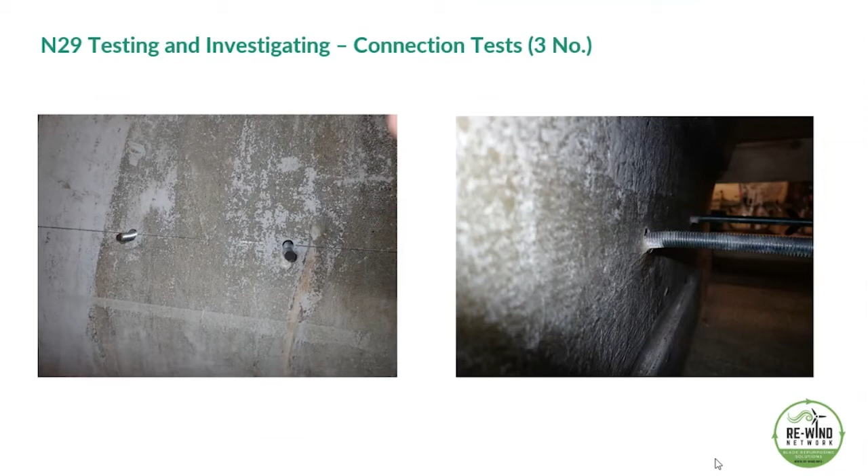These then are the blind bolts. The blind bolt is a proprietary system where the bolts are common garden bolts in some respects, but they have a little piece of metal that drops from the shaft of the bolt to allow you to gain purchase on a surface you can't otherwise access. These are produced under patent by the Blind Bolt company, so we were quite keen to test some of these.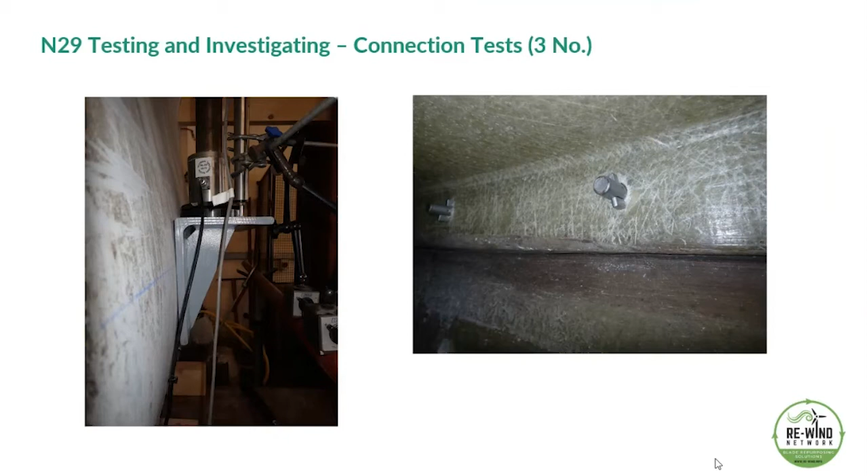These are the blind bolts. Again, we had no surface damage at all on the FRP blade under that test, up to about 5.5 ton. If you look at the lower blind bolt, or in fact both blind bolts, you can see there's a bit of bending in the shafts of the bolt, so again, the bolt was failing before the FRP in that case as well.

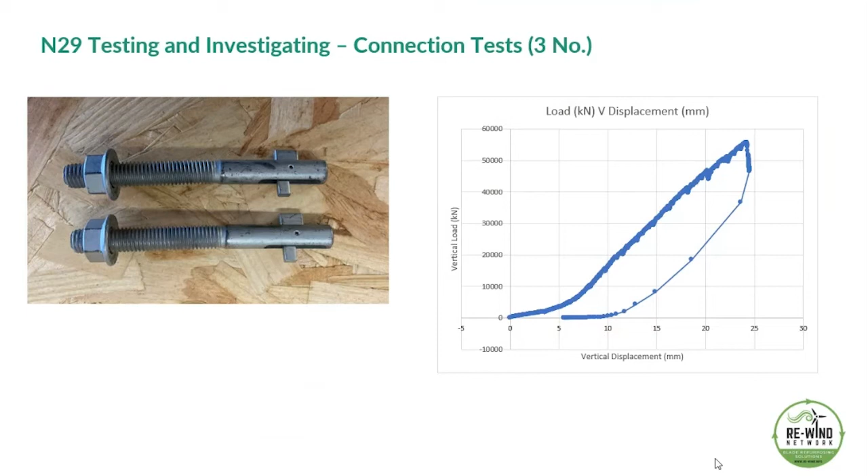As Larry mentioned, one of the problems we have with repurposing wind blades is that we don't have any information from the original blade manufacturers, for their own reasons. So between laser scanning, measuring with calipers, and doing all sorts of things to get as much data as you can, it's really a question of accumulating as much information as possible.

When Zoe was with us from Georgia Tech in the first six months of the year, she did a lot of work using FRP burnout tests. In this process you cut tokens out of the blade in various locations where you might be interested in the number of plies of fabric used, then take a single one of those pieces and put it into a high temperature oven, about 600 degrees for maybe an hour and 20 minutes. That burns off the polymer resin, leaving the various original layers of ply which you can separate out. You can check the orientation of the fibers in each layer and measure volume fraction, etc. All this information is very important to help build up a thorough understanding of the blade.

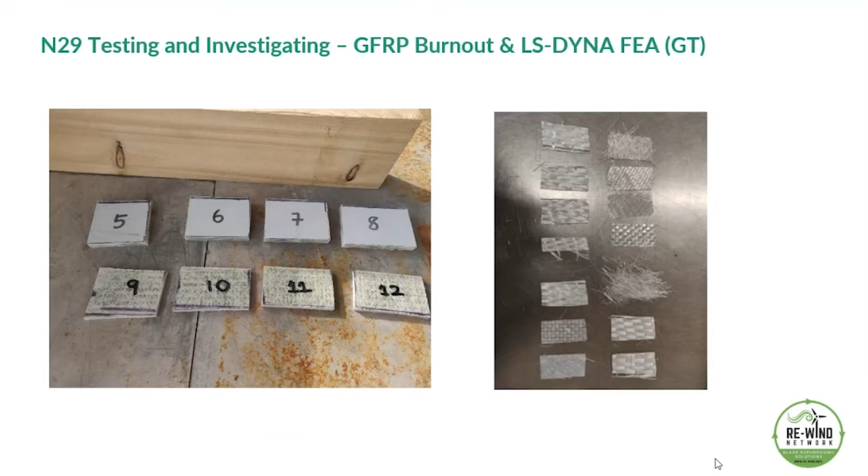If you see the next slide, that work primarily feeds into producing accurate FEA models of the blade itself. This particular work was undertaken by Dr. Russell Gentry at Georgia Tech. So we took our data recorded from physical testing, burning and measuring in Cork, and worked with the team at Georgia Tech to produce accurate FEA models of the blades, to help us really understand and guarantee the client that what we're doing is structurally sound and fit for purpose.

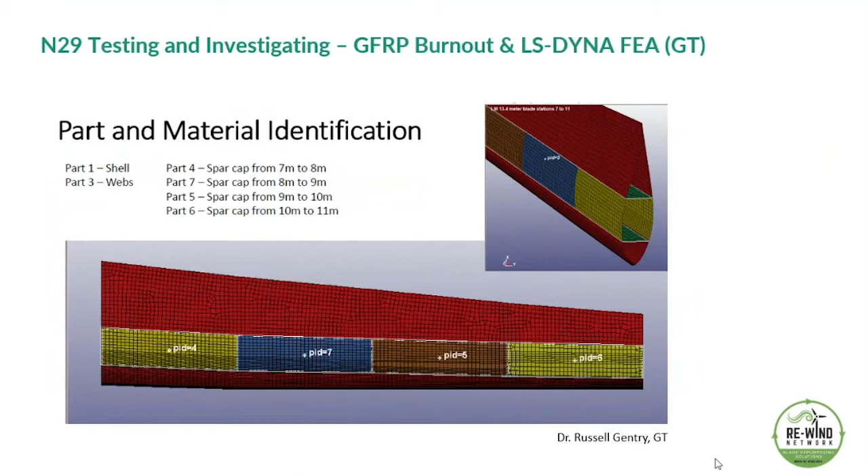Next slide. Right, so we move on to design development now. We're currently at an advanced stage of design development. Just an overall timescale - the Midleton Greenway, it's expected that the first part will be opened by Easter of next year, and we're working hard to maybe deliver this bridge in the coming weeks and months, certainly before Christmas.

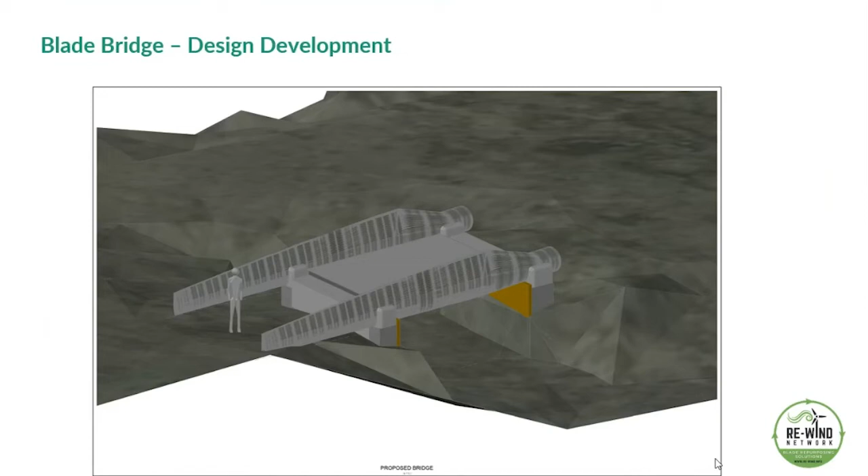Next slide. Dealing with the blade geometry, we're achieving an 18 degree skew, which is kind of an awkward thing to play with and adds further complications, but most bridges have some degree of skew in them. So with 18 degrees of skew, we're getting a clear width of 3.5 meters through the bridge deck.

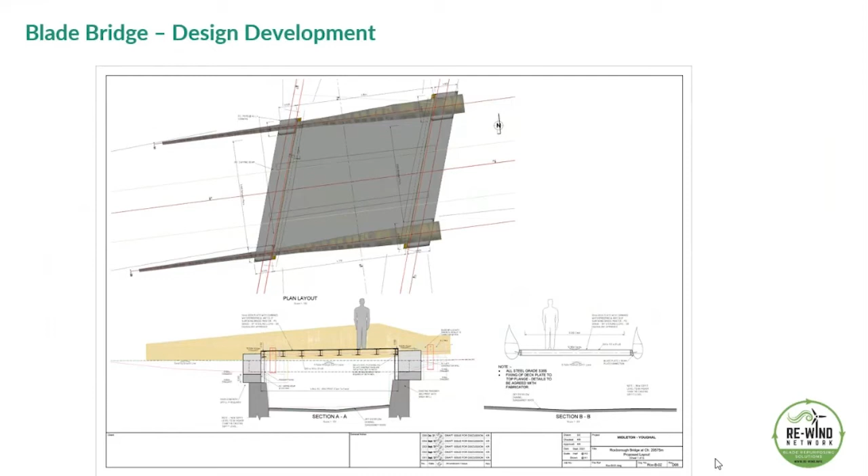Right, and I suppose the construction process - as it's being developed now for the blade bridges, we'll be preparing the abutments, the existing abutments, for reuse. Those abutments are 750 thick and made of dressed limestone, and we're satisfied through qualitative analysis that they're fit for purpose for taking the new deck. So we'll be pouring an initial bearing plinth, and making bespoke steel cradles for the four supporting points of the blade. Those supporting cradles will be cast into the first pour of concrete on the abutments - that's the darker grey area in the top left corner.

Then we'll have Dywidag bars, or high tensile bars, drilled through the blades at the right location, so that when we come on site, we can land the blades, or the completed bridge deck. We're still debating whether the completed bridge deck or pieces are lifted in parts.

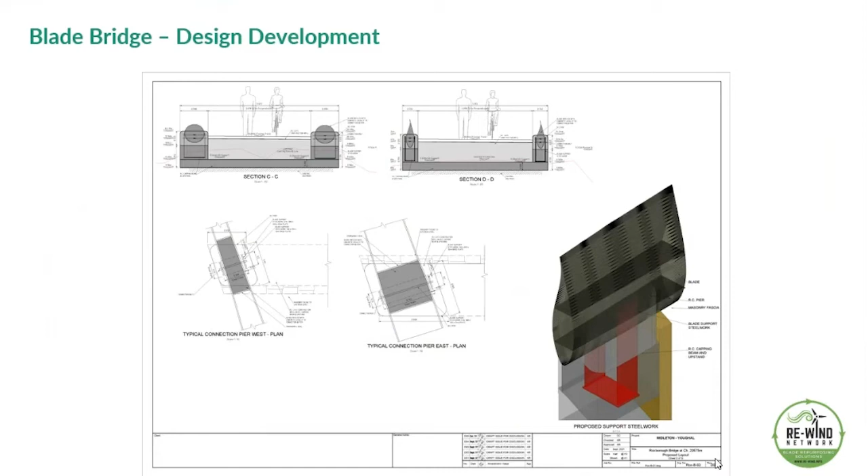They'll land on the protruding cradles, and then there's a final pour of concrete to lock everything in place. We're calling these the pilasters, and these four high quality concrete finished pilasters will form the ends of the entrance into the structure.

Next slide. The structure itself, the deck structure, will be a steel structure, just a series of I-beams.

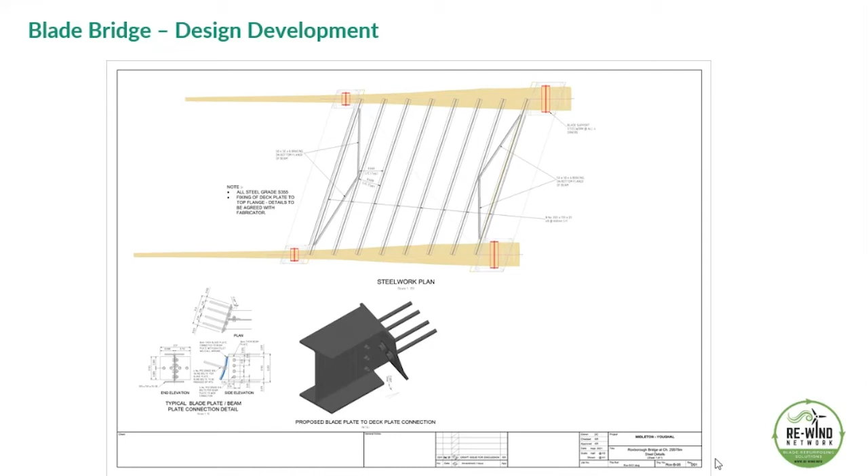There's been much discussion in recent weeks about the type of deck finish to use. We were looking at various options, including GRC, fiber reinforced concrete planks, in situ concrete, and steel plate with an epoxy resin like a Bridgemaster finish. After much discussion, we're going to use a steel plate deck with a Bridgemaster Sterling Lloyd type finish to get the final running surface for the deck itself.

Next slide. Now, parapets - you would have seen in earlier photo montages some ideas on parapets, but we're engaging very tightly at the moment with Cork County Council and their landscape architects, the Paul Hogarth company, in developing parapet solutions for the bridge. There's various ideas in play at the moment.

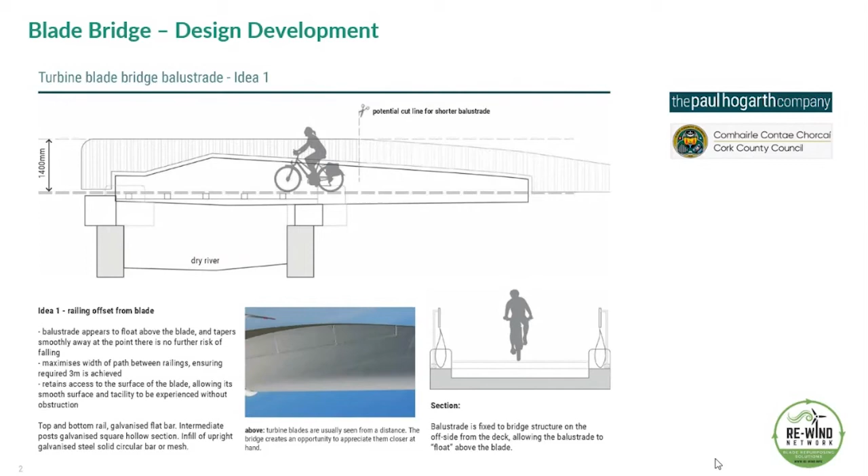If you go onto the next slide there, Larry. This is kind of a favoured solution at the moment, which mirrors the blade profile through the railing of the parapet. The parapet itself can be either stainless steel, galvanized steel, or weathering steel. We've yet to make those decisions, but they'll be made quite shortly.

Like all cycleway pedestrian bridges, the parapet height from abutment to abutment will be 1.4 meters high from finished deck level, but we can taper it off once we're off the bridge deck. We want to do this because there's nothing to protect - there's no need to protect the approach cyclists at that point because we're on flat ground. Next slide.

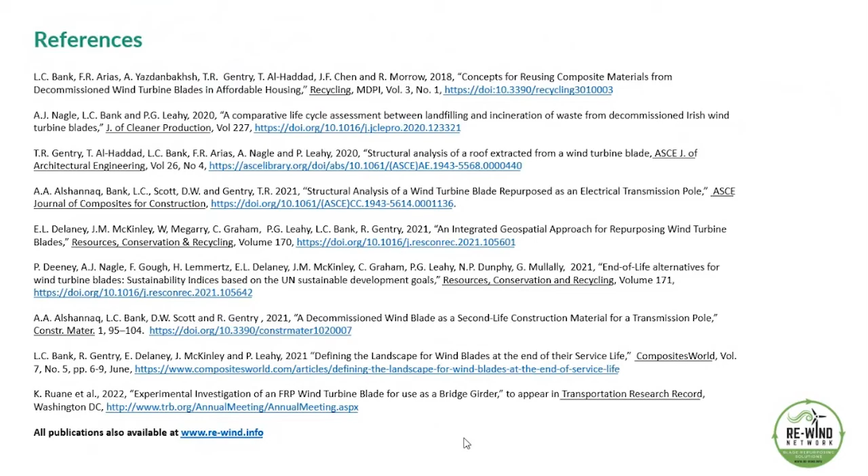Kieran, you want to take some of them? I'll take some of them. Yeah, well, I might just read out some and you can decide.

So the first question was from Georgios, and it says: I understand that the FRP composite wind turbine blades come to the end of their design life, but do they get replaced because they're faulty, or because they just go to the end of their design life?

So I'll take that question. This, Georgios, is an interesting issue. It depends entirely on where you are.

What we are seeing in the United States at the moment is a significant amount of repowering. In other words, taking down the original turbine or blades on an existing turbine at an existing wind farm in order to replace it with a more efficient turbine, generally producing more power and able to perform in lower wind speeds. We call that repowering. The blade we are working on in Kansas has only been in service for 11 years, and they're already taking it down and replacing it with a larger turbine and larger blades.

On the other hand, we've seen blades in other parts of the world being extended. So after the 20-year design life, they are extended with various solutions, including even lengthening blades. These are all generally fairly expensive propositions and need to be considered as essentially a financial decision by the operators.